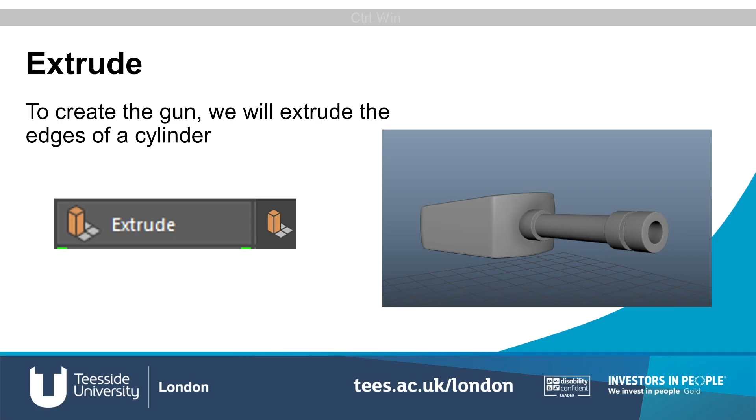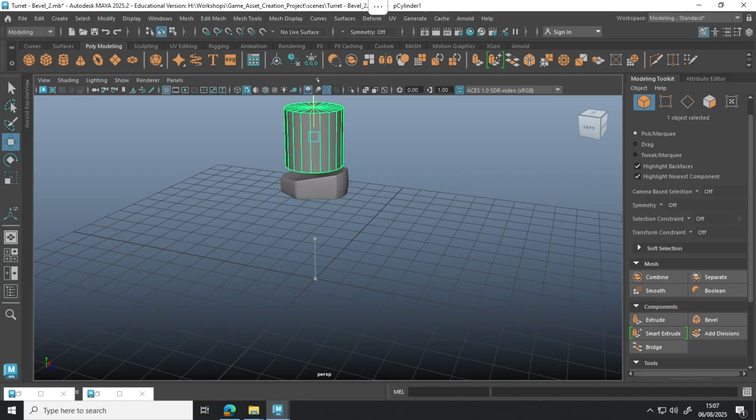So we're going to start off with a cylinder shape. I'm going to go to the top left-hand corner, click on the cylinder shape, and that will bring in a cylinder polygon object into our scene. I'm going to move it up, and I'm going to rotate it so it's the correct orientation.

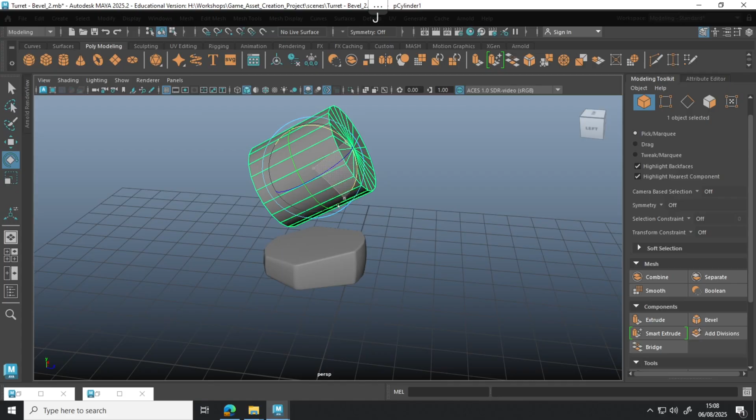So I'm going to go into my rotate mode, hover over the red circle, and this time I'm just going to hold down J while I move the object. It just means it will snap where I need it to snap, so that we can get that perfectly horizontal in the scene.

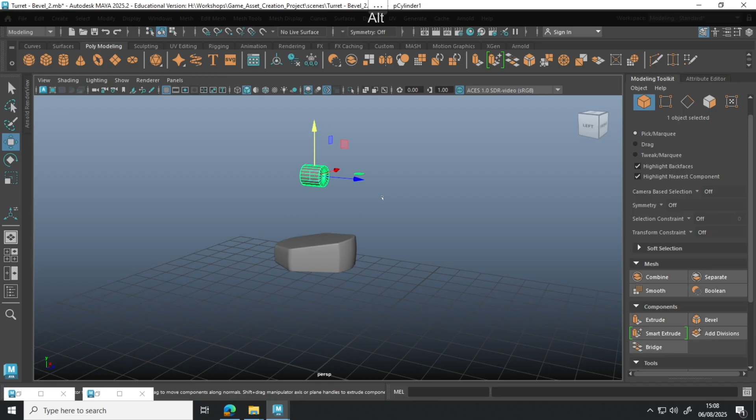The next thing I'm going to do is scale down, making sure that I am uniformly scaling it down with this center cube, the scale tool, until I'm relatively happy with the size here. Once I've done that, I'm just going to roughly move it into place so I can get an idea of the size it needs to be, and refine that a little bit before we create the object in full.

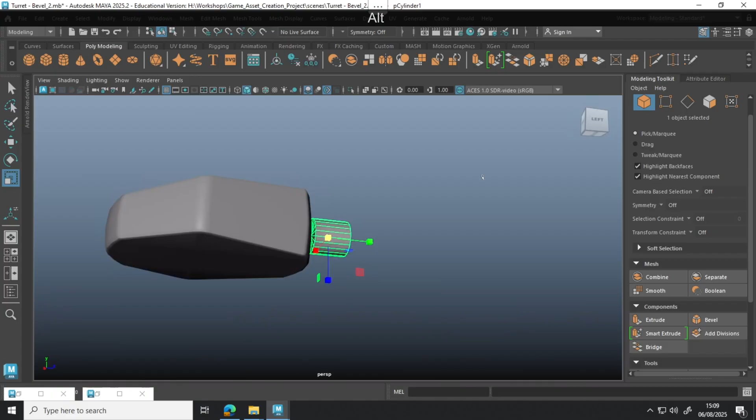So I'll scale it down a little bit because it looks a touch too big for the turret that we've got. And I would say we're getting close to that looking good.

Okay, so I'm going to just squash it down a little bit and move that back to place.

Okay, so the next thing I'm going to have a look at is extruding the edges, but there's a tiny bit of prep work we need to do just before we do that.

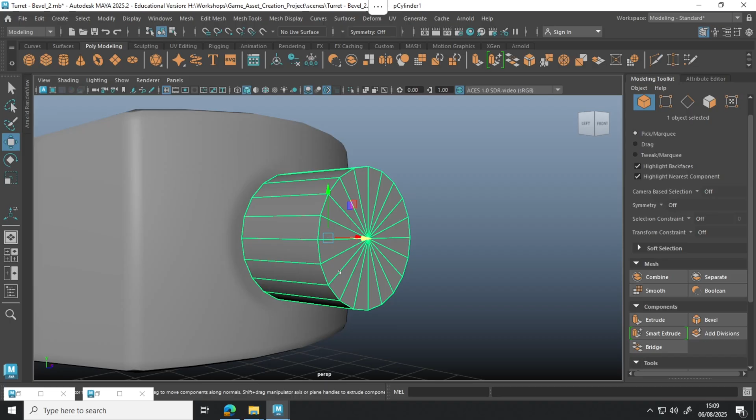The first thing we need to do is to delete these faces, these top faces here. So I'm going to go into face mode, and I'm going to teach another selection method or selection trick that we can use rather than having to select every face individually.

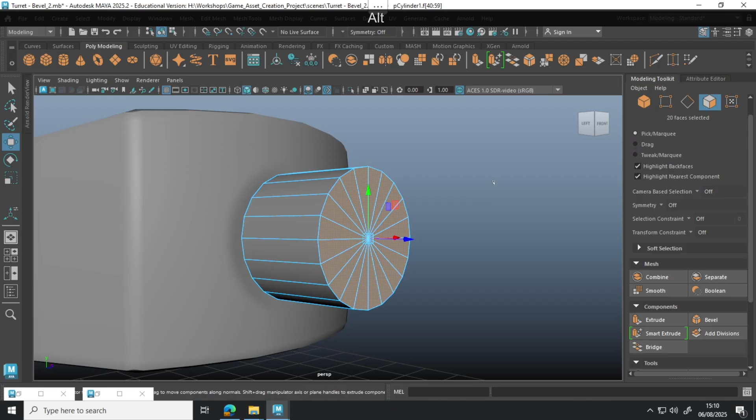We're going to hold down Tab, and that will allow us to paint select. That means we can just drag our mouse over where we want to select. And you'll notice that if I move my camera around, it hasn't accidentally selected any faces behind, which is really useful. So we've selected all of those faces, and then we're going to just delete them.

And what that means now is that we can extrude from our edges. So I'm going to go into edge mode, and double click to select the full edge loop, and use our new tool, which is Extrude. Extrude essentially allows us to - I will show you what this extrude has done to our edge.

Now what I'm going to do is switch into our scale mode, so the shortcut for that is R, and that will give us our scale tool. If I scale down, you can see that we've created an additional layer of edges that we can then shape and pull and push around until we're happy with it.

So I'm going to move the edges to about here, so we've got a nice edge here, or a border around our gun.

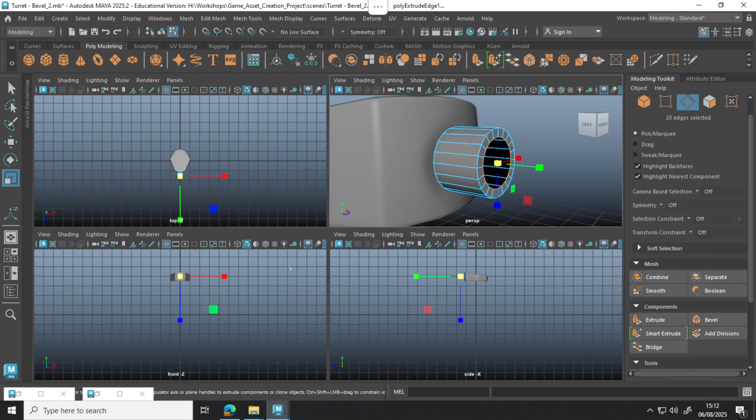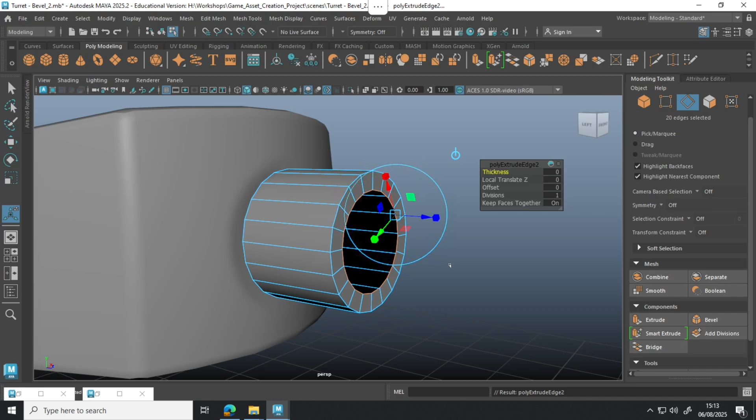So make it a little bit smaller, and then I'm going to extrude once again. Extrude, extrude. And this time I'm just going to use the arrows that appear when you extrude.

And I'm going to use the blue arrow here to pull out the length of our gun. And I can use our left view here to get an idea of how long we need this to be. So it'll probably be around here.

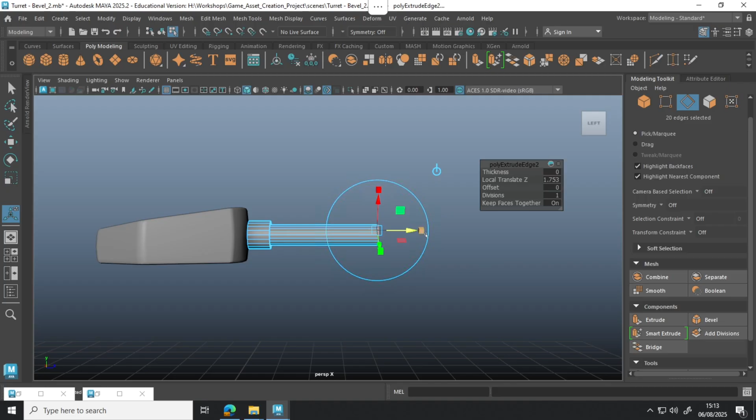And once I've done that, I'm going to go back into the normal selection mode by pressing Q, and I'm going to extrude again. I'm going to create a kind of another bracket for the gun. So I'm going to extrude again.

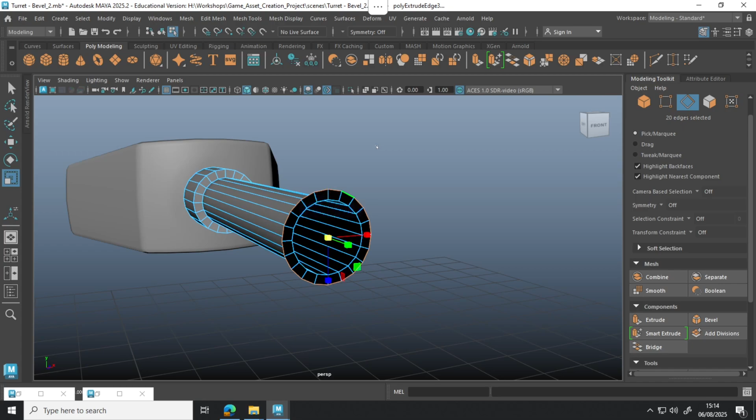And this time I'm going to go back to my scale tool and scale up. Now what I want to do is get this roughly the same size as this bracket that we've got at the beginning. And that's going to be a little bit difficult to do in the viewport that we're in at the moment. So what I'm going to do is just press spacebar on my keyboard, and that will bring us out to these 3 additional views that we have for us.

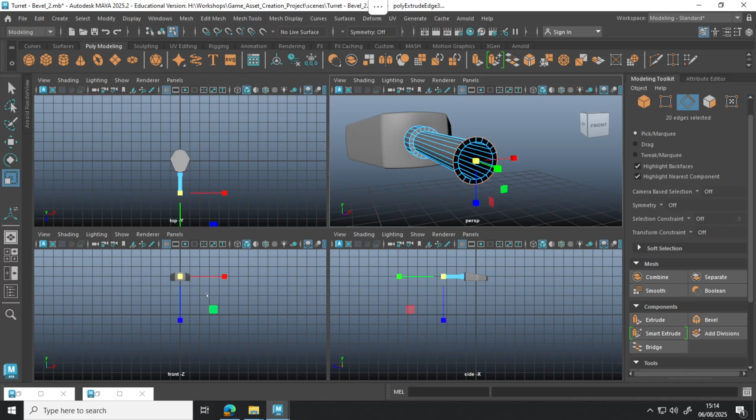You'll see one of them's our side view, one of them's our front view, and one of them is our top view. Now what we're doing here, we need to look into our front view. So I'm going to hover my mouse over the front view, which you can see labelled at the bottom of each viewport.

I'm going to press the spacebar key and that's going to full screen that. I'm then going to press F to focus in and zoom out a little bit so I can focus on what I'm doing here. And then I'm going to continue to scale this up. You can see we can now very clearly compare the scale of this first bracket to the new bracket we are creating. So we want this to be roughly the same size.

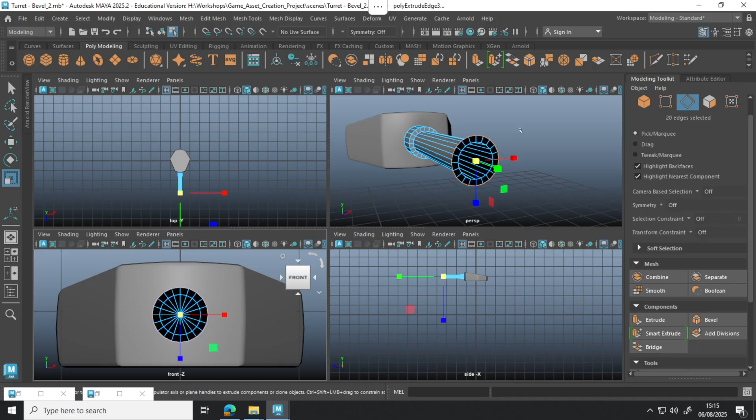So once we're happy with that, we need to switch back to our original viewport. To do this, I'm just going to press spacebar again on my keyboard. Then I'm going to hover my mouse over our top right-hand corner view and press spacebar again. And now we're back in our perspective viewport.

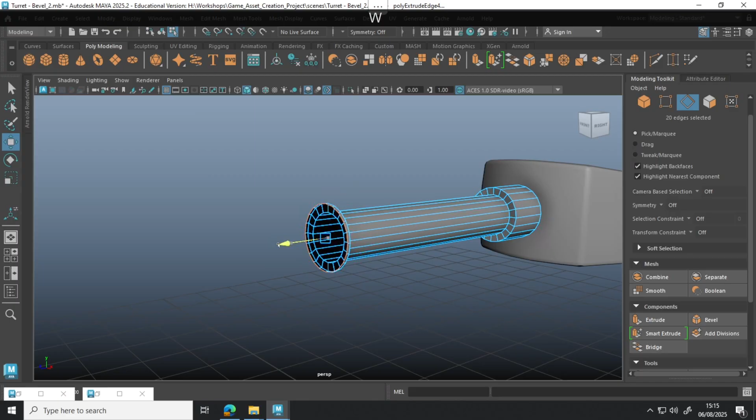And then I'm going to extrude again, so down to my modeling toolkit and click on extrude. This time I'm going to switch to the move tool, and I'm going to move the edges out to about there. Extrude again. Switch to my scale tool.

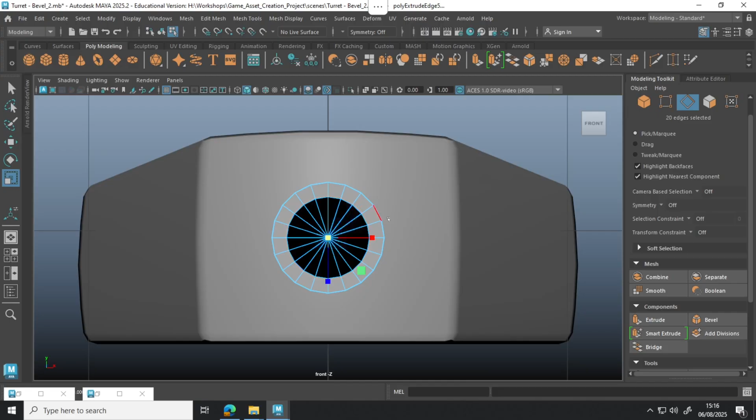And then I'm going to go back into my front view again. So spacebar, hover the mouse over the front view, spacebar again. I'm going to scale down so we have the same uniform sizes. I'm going to do the same thing again, back into my perspective view.

This time we'll do a little extrusion because we want kind of a little slit detail in the end of the gun. So I'm going to extrude out, but not too much. Once again extrude, and into my scale tool, and go back into my front view so I can make sure I'm keeping that uniform size.

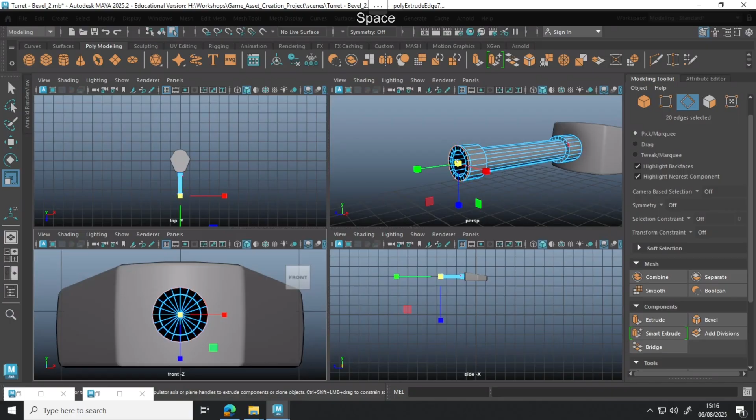And finally, I'm going to switch back into my perspective view. Extrude once again, so go and click on extrude. Bring this out, and probably try and make this bit slightly shorter than the first bracket.

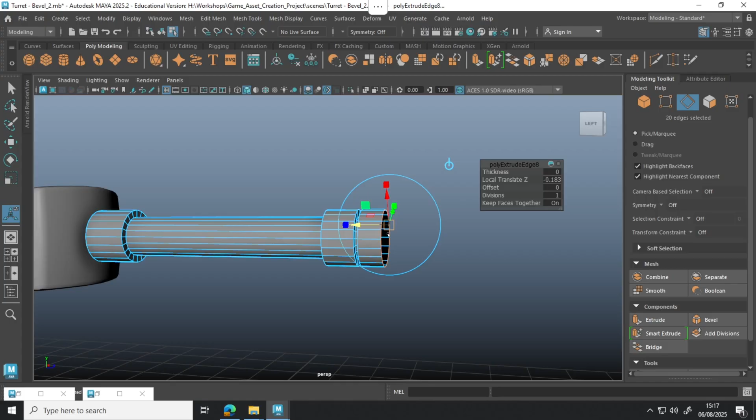And then we'll do a couple more extrusions to finish the basic shape of the gun. So once again I'm going to go to extrude. And I'm going to scale this down. This time I'm going to eyeball it because this is going to be the end of the gun, so we're just going to decide how big we want the sort of bullet hole, or rocket hole, to be.

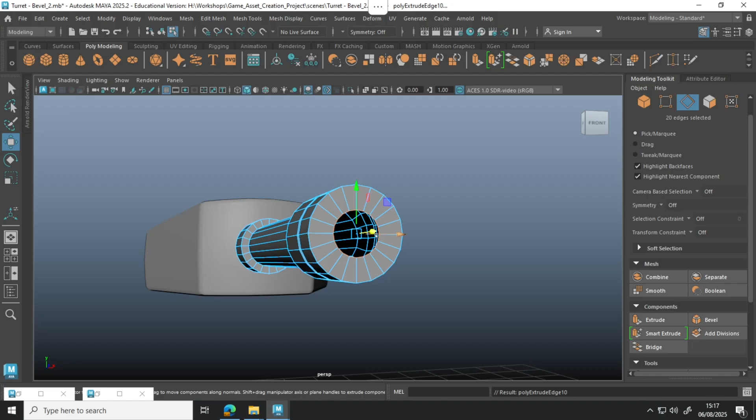Okay, so I'll say about there, and then once again go to extrude and switch to my move tool this time, and I'm going to move it back as far as I can go, really, to cover the inside of that section. All we need to do is make sure this inside section is not larger than this section here, otherwise we'll get a little bit of overlapping. As long as we've made that bit small enough, we should be good.

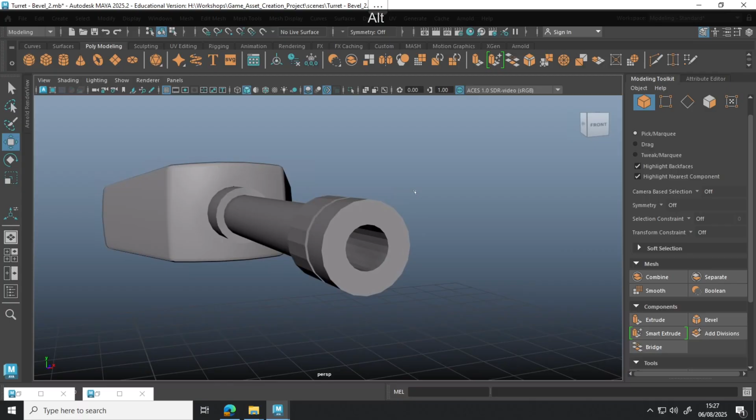So our turret section, we have the basic shape, but same again, similar to the turret, we've got a bit of blocky edges and some sharp corners that we want to try and resolve. So I'm going to utilise the bevel tool again.

So I'm going to go to my edge. This time I'm going to select all of the edges that I want to bevel because we want to apply a consistent bevel across for this particular object. That means we can just select all of the edges that we need and bevel it all in one go. So I'm going to hold down Shift and double click on each of the edge loops that I'd like to bevel.

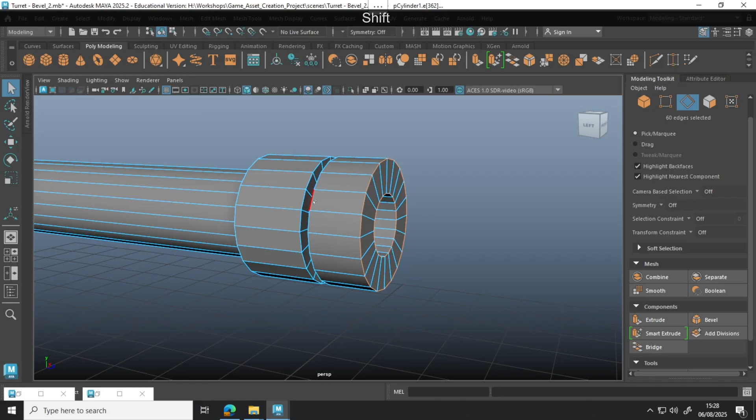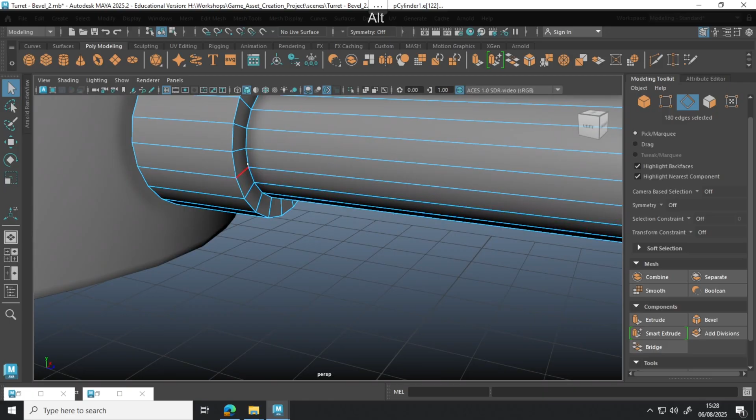And I'm going to try and get these inside sections as well, so I may have to zoom in a little bit. Make sure I'm getting both of these edges, and also the start section as well. I'm going to bevel this edge as well. Okay.

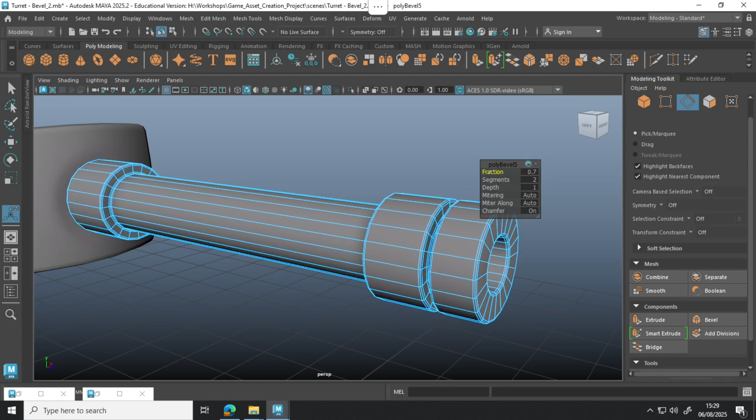So once I've got all the edges that I'd like to bevel selected, I'm going to head back into my modelling toolkit and click on bevel. And we can, just like last time, adjust the fraction and the segments to suit the look we'd like to replicate for our gun.

So now our edges are looking a lot more smooth and I think we're ready to move on to the next section.